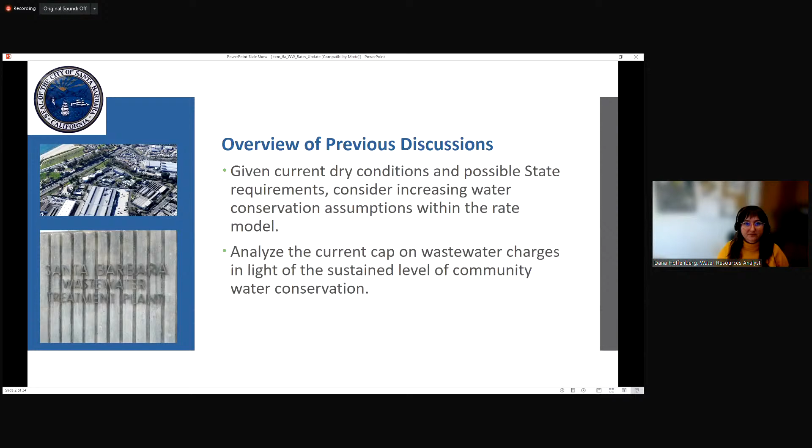Next slide, please. So just going over a summary of some updates to the rate model and rate design.

So first off, water conservation. Originally, the model had 0.2% assumed annual conservation. What we did is bump that up to 2% annually for our residential customers during the 3-year rate making period.

That does have effects on the rates, increasing our overall revenue requirement from 6% to about 7% on average. So last time we spoke in January, we discussed a revenue requirement of about 6%. The model is now reflecting 7%. Just as a reminder, this is an overall system revenue requirement, so how that impacts individual bills will vary depending on the customer class.

Mr. Haggmark: Yes, I just wanted to remind the Water Commission that when we're going through this process, we're establishing methodology for the highest rates that the council can ultimately adopt. Certainly, if we find ourselves in a much better water supply situation, or get a miracle month of March, the council, even if we move forward with the current rate notice, could adopt something lower if our situation improves.

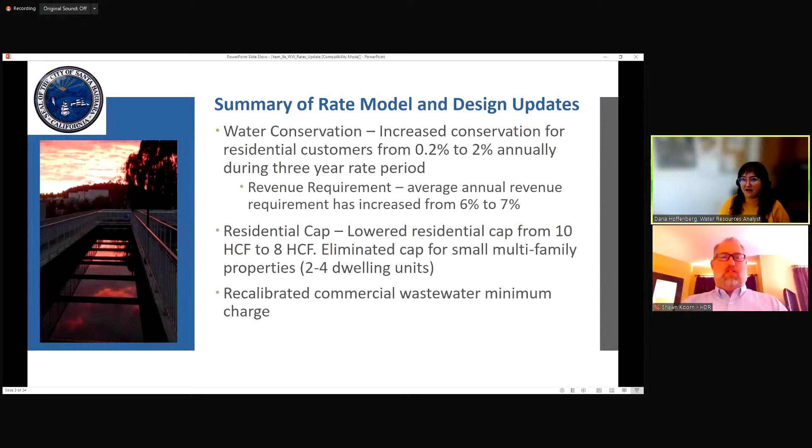And lastly, for our commercial customers, our analysis indicated we need to do a little recalibration for our wastewater minimum charges to be more in line with our cost of service analysis. So with that, I'll ask for the next slide and turn it over to Mr. Koorn, our rate consultant.

Thank you, Ms. Hoffenberg. Good morning, Chair Davis, Commissioners, and Council Member Snedden. I appreciate the opportunity to be with you again. As we kicked off many of these meetings recently and in the past, I just want to remind you all of our overall goals as we go through this process.

It really boils down to a primary goal of providing sufficient revenue to operate and maintain the city's wastewater infrastructure through cost-based and proportional rates that meet the requirements of Proposition 218. That's really what this whole process is about. And if you remember, it's a three-step process. As Ms. Hoffenberg noted earlier, it was 6 to 7% overall—that's the revenue requirement component.

We then need to go into the cost of service to determine the proportionality for the rates for each customer class of service, or your rate schedule—your single family, multifamily, commercial, and commercial high strength customers. As we go through that process, that gives us the basis for the requirements of 218, and then we can develop rates to meet those overall requirements that reflect our cost of service analysis.

So this morning, I'm going to walk you through the updated revenue requirement, as mentioned earlier, with the changes and discussion from the last Water Commission meeting. And then we'll talk through the overall results of the cost of service and the recommended rates.

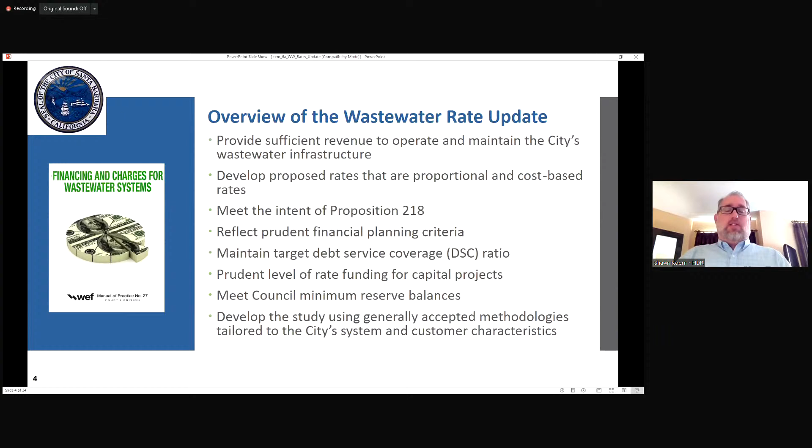So I'll start off with the revenue requirement. Remember, this is the first of our three analyses. And on the next slide, we have our summary of the key assumptions. Ms. Hoffenberg already touched on this. We did, based on our discussion with you all, go back and take a look at this in our single family and multifamily, so our residential customers.

We've reduced by 2% annually in fiscal years 23, 24, and 25. Our commercial and commercial high stayed at that 0.2% conservation for that same time period, given when we look at the consumption patterns, what that looks like with the recent pandemic and where things are moving going forward.

The O&M, remember, our operations and maintenance expenses are based on the fiscal year 2022 budget, and then we've adjusted that out into the out years. So for fiscal year 23, this upcoming budget year, starting here in 4 or 5 months, we've adjusted that to reflect what we talk about as known and measurable changes. So as an example, chemical costs have increased lately, and so we built that into the overall budget for this upcoming budget year in the rate study document.

Moving forward, so fiscal year 24 and out, that average inflationary increase is 3.5%. So as we talked a little bit about last time when we met, current inflation is, depending on the indices, 5 to 7 or a little bit more percent in recent months, year over year. This is the historical level of inflation that we've built out into the future.

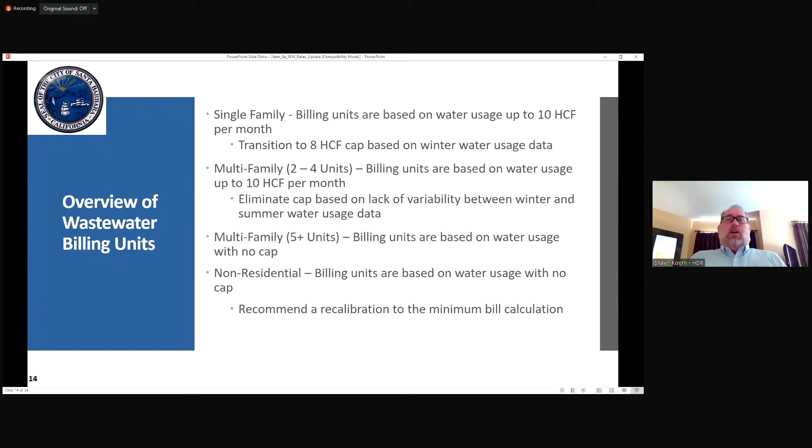This gave us some additional data points to come back and say that this 8 HCF cap is more reflective of how your residential customers are utilizing the system from a wastewater volume generation perspective. So thinking about how we're using water indoors in those winter months, that's coming back to a new normal, or that amount we're going to be set at going forward for some time. So that gives you a little more background on that.

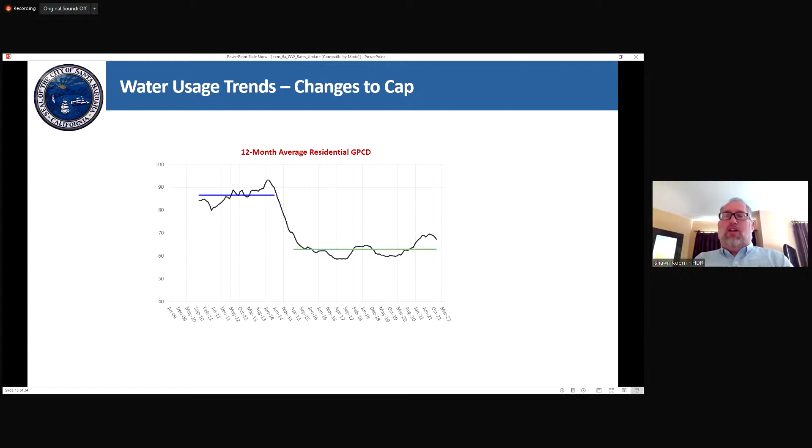On the next slide, as we go into our single family rate structure, there's a flat fixed charge, a base fee per month, and then our variable charge up to the cap. You'll see 6 rows of the volume charge. Our current rate is $3.71 per 100 cubic feet up to 10. In '23, we reduced that to 9. In '24, down to 8, and then it stays at that 8.

What we wanted to do is transition this in over a couple of years so that customers could get used to what that adjustment is going to be and minimize any bill impacts into the future, but also provide that known change that's coming up. So this represents that overall rate adjustment. You can see the adjustment to that monthly fixed charge and then to the volume charge as we go through that.

On the next slide, we have our multifamily customers. They're billed very similarly: there's a fixed base fee, and then per dwelling unit. There's a volume charge up to the cap for the 1 to 4 dwelling units, and no cap on the 5+ dwelling units. Our recommendation is to move the 1 to 4 dwelling units, the small multifamily, to no cap, given the review of their information. Those rates then reflect the overall billing units on the system.

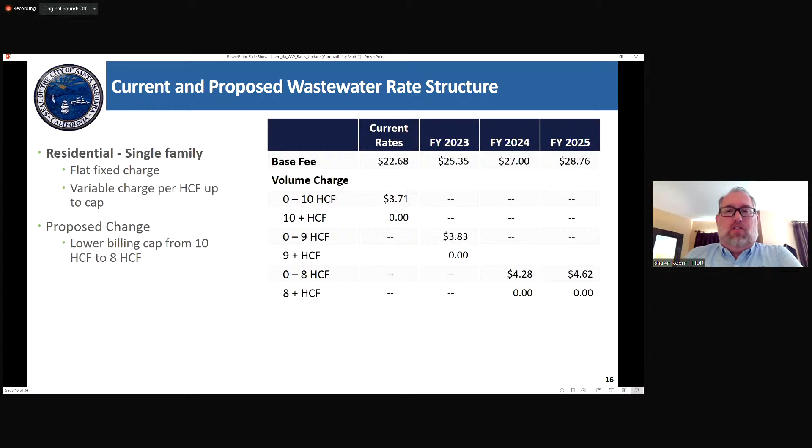So moving forward, the multifamily follows the same approach, with the exception of the 1 to 4 dwelling units. We did remove the cap in fiscal year 23, and those rates are adjusted the same as the single family rates.

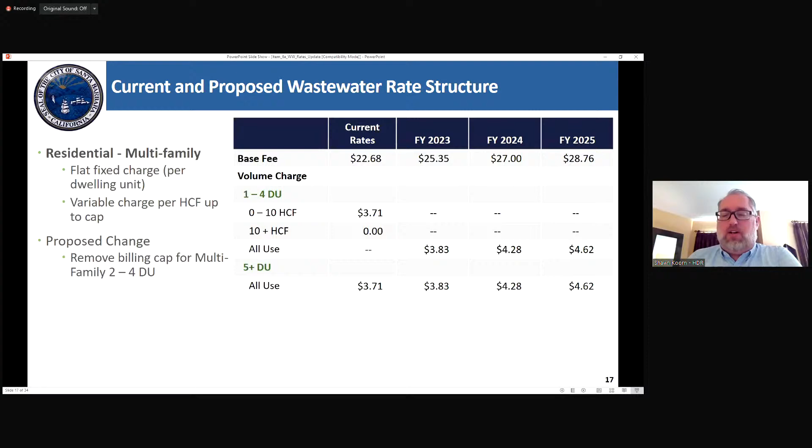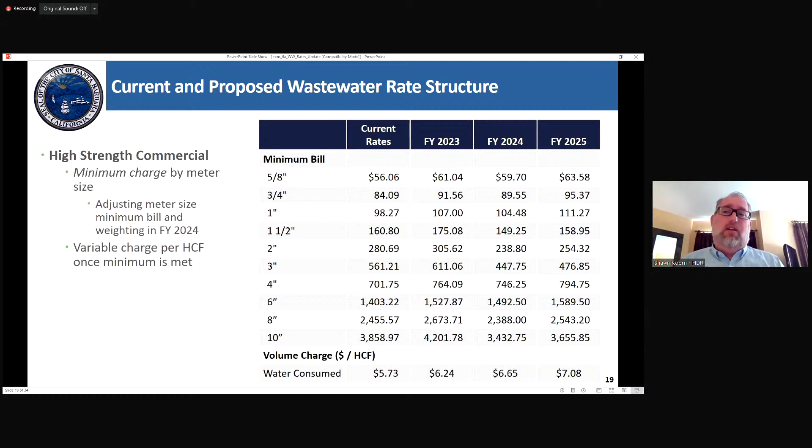Finally, on the next slide we have the high strength surcharge for customers in the high strength commercial class. If they go over those strength limits, there's a surcharge on a per pound basis. Those customers are monitored and tested, so we know the strength of the wastewater and the total amount, allowing us to calculate total pounds and charge accordingly. This is impacted by the increase in chemical costs -- that's built into our revenue requirement, but when we allocate those chemical costs, they're really tied to the strength-related components.

Our BOD, biochemical oxygen demand, is staying flat for fiscal year 23 at 32 cents per pound, then adjusting in the out years. Our TSS, total suspended solids, is 42 cents, increasing to 46 cents. Our ammonia is currently 98 cents per pound, increasing to $1.10 per pound. As we evaluate why costs are incurred, ammonia is a key driver in the cost of service right now, which is why you see a bigger proportional change in that component cost. This applies to customers who are tested and discharging higher strength waste than what's included in the commercial high regulations.

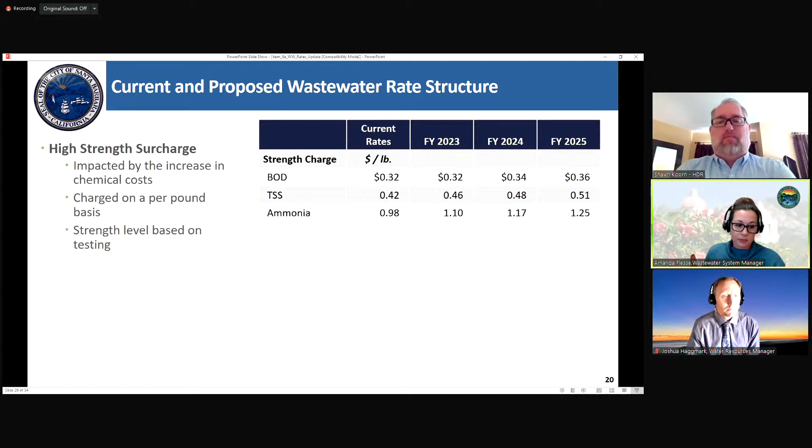Thank you. So on the next slide, we start getting into some of the bill comparisons, and I'm going to turn it back over to Ms. Hoffenberg to walk you through some of these comparisons.

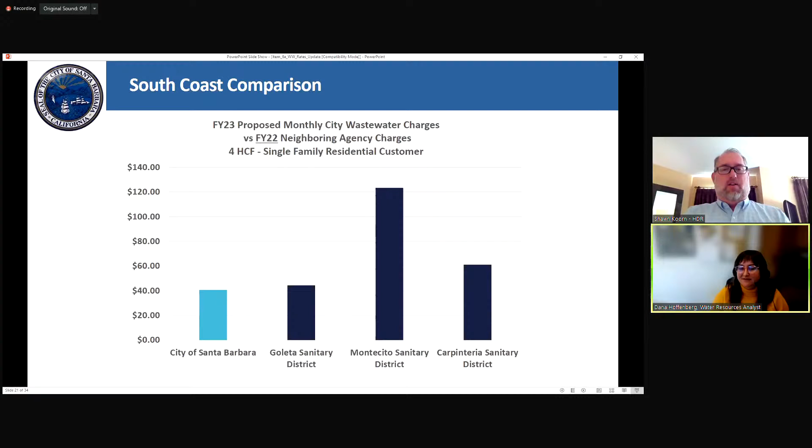Okay, hello again everyone. So we're going to reset a little bit and look back at single family bills. This chart shows a bill comparison for a City of Santa Barbara wastewater customer compared to some neighboring agencies. A couple of points to keep in mind: this compares our proposed rates to our neighboring agencies' current rates, since their proposed rates weren't ready yet. So keep in mind it's possible their rates will change, probably increasing, given everything that's going on.

That's why it says FY23 city rates compared to FY22 neighboring agencies. Our neighboring agencies also have a different approach of billing their customers than we do. As we've discussed, we have a volumetric component for our customers, while our neighboring agencies just have a flat annual charge. So it's going to look a little different as we go through the different water usage levels.

This is for a single family residential user, a low water user, a low discharger, only 4 HCF. You can see we're on the left there, so we have a pretty low bill compared to our neighbors.

This is more of an average discharger for single family residential compared to our neighbor agencies. We're still right in the pack, and I anticipate we'll still be right in the pack after our neighbor agencies have changes to their FY23 rates.

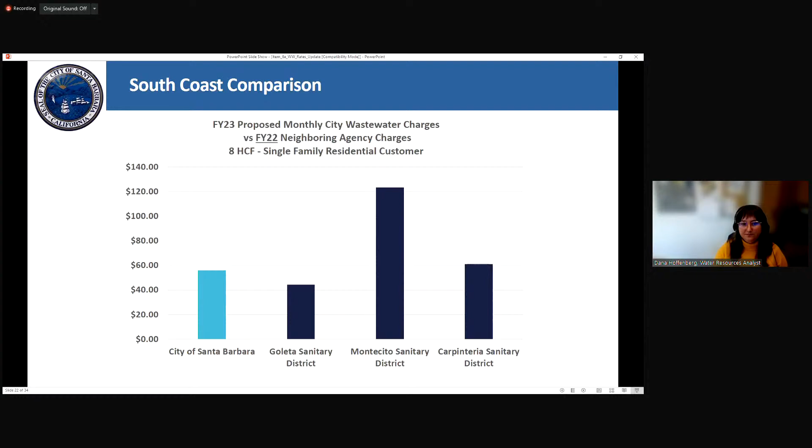As you know, we are a full service city. We have many different things that we charge for on our utility bills: water service, wastewater service, and trash and recycling service. A single family customer who has all those services will receive one bill with all of those services on it.

Going over next steps, we want to finalize our technical analysis based on any input we get today from the Water Commission. We also have another portion we're going to go over, which is our capacity charges, and then we're going to be presenting our final recommendations in March at the Finance Committee.

We're going to do a public rate notice, and then we're going to have a public webinar talking about the rates for people who want to ask questions or be more involved, in May, and then our public hearing in June. And Joshua, did you have anything you'd like to add?

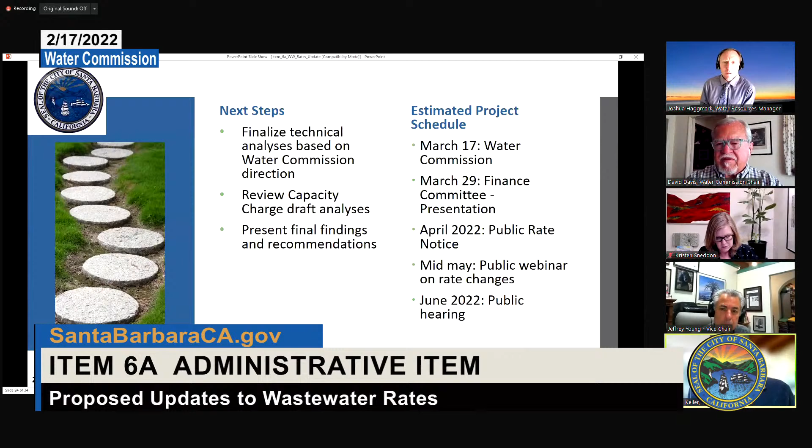I wasn't thinking about that specifically, but I think it would be good to have it as a recommendation so we can actually see it, see what the recommendation is likely to be, and then we can go ahead and either vote on it or comment on it before it goes forward. That would be the intent of putting it on consent - you get to see the full package and make a recommendation to Finance Committee, that would be the packet. It's just whether you want another presentation on the wastewater rates, because we don't see them changing from what was presented today. So that was the intent there.

Just to note, if there's something of interest, we can pull it off consent - even though it's on consent, we can always pull it off. Other commissioners want to weigh in on that question? Arturo, you still have something? No, not on that question, I have some other questions. I agree with Arturo, so that's helpful. Yeah, as well as I. Okay, there you go. So, Joshua?

My question is with respect to the unusual levels of inflation we're seeing everywhere. I know we just completed this study, but one can imagine that things like the upgrades to the El Estero Center, in terms of electrical equipment as well as operational costs, are going to change significantly. How robust is the current analysis to those changes we may have in the near and midterm future? We've done our best to try and mitigate those.

You'd see we have a 3.5% inflation plan for the next 3 years, so we're planning for roughly 10% inflation over the next 3 years. Our current rates for construction are reflective of what we've seen this year, so we've projected that out and incorporated the accelerated inflation we've seen this year.

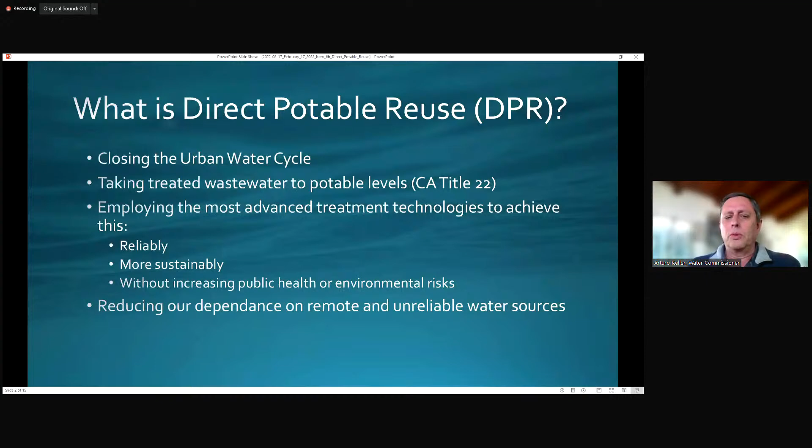So next slide. Just a quick recap. I know the Water Commission is quite familiar with many of these topics, but just for the public that may be listening, where does our water come from? It's important to think about that. We have a significant amount of our water coming from local surface waters, both Cachuma and Gibraltar reservoirs, but those are quite variable. They're very dependent on our climate. And as we see, we've had a number of drought years, and it looks like that will be kind of the new normal to have more and more of these very dry years. So our local surface water is quite dependent on the climatic conditions that we may have.

Another important source is the Sierra Nevada, and by that we mean bringing water from the Sierras down to our local communities through the State Water Project. There are other projects that bring that to other communities; this is specific for Santa Barbara that we're talking about here. And so that's a fraction, but again, a very unreliable fraction because unfortunately, as we know, the snowpack is very inconsistent and the ability to bring water varies tremendously from year to year.

The third one is local groundwater, and that includes Mission Tunnel, which has seeping water considered kind of a local groundwater. That's a small fraction, as we see in the diagram, in terms of groundwater. We don't have a very large aquifer that we can tap into, so it's something we can rely on, but we have to let it sit around and rebuild itself so that it fills again and we can use it reliably.

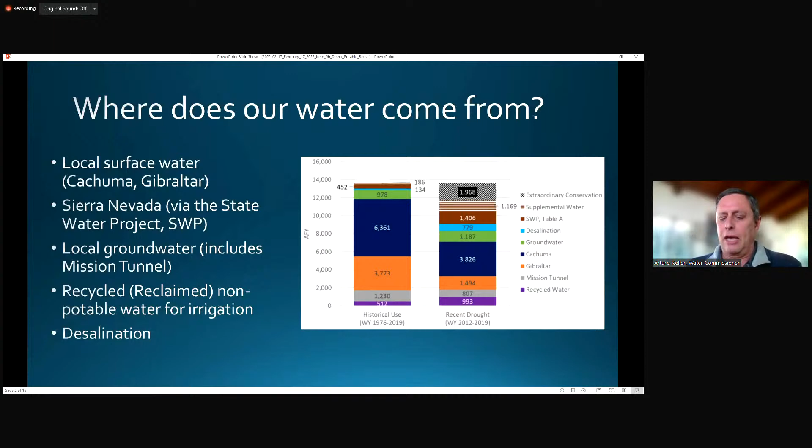Next slide. So what I mean by closing the urban water cycle - let's take a look at this diagram. Start on the lower right-hand side where it says start. There, we're taking our water from groundwater or a reservoir, for example Cachuma or Gibraltar or other reservoirs that other communities may have, or other surface water sources. It's brought into the system, and we go up on the right-hand side.

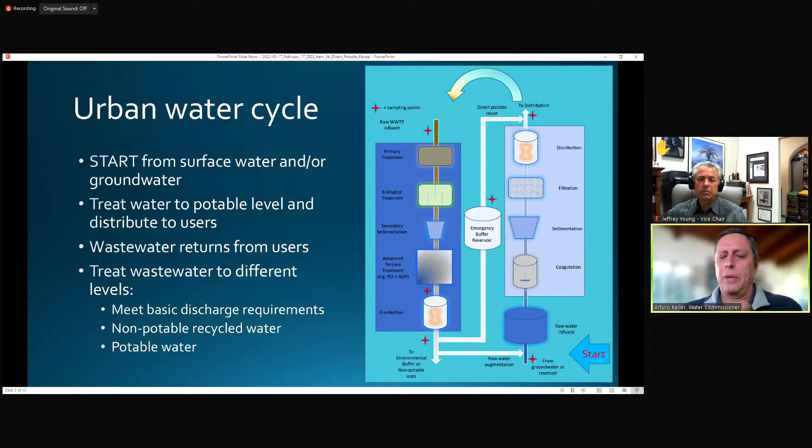And if we go back to that slide just for a second—I have these little stars, which are some recommended sampling points. As we'll talk about monitoring, it will be important to keep in mind that we would like continuous monitoring of these sampling points, because that will be important in terms of making sure it's reliable.

So, next slide. I was talking about the most likely treatments, which are what's called micro and ultrafiltration.

These are basically steps to remove most of the chemicals we have of concern, but the pore sizes for micro and ultrafiltration are still too large for some of the molecules we need to remove. So they serve to do a pre-treatment before the next steps, but they're not effective in completely removing things. So then we go into a very, very fine pore, and I'll show a diagram in a couple more slides of what reverse osmosis is.

Reverse osmosis is going to remove many salts present in our wastewater. Humans consume a lot of salt, not just sodium chloride, but other salts like potassium and other things we may be consuming. So we need to remove some of these things from our waters. So that first part is some of the salts.

Also, many of the organic molecules that may be from personal care products, pharmaceuticals, as well as industrial discharges or other things that may still be left behind after all the treatment process. So reverse osmosis is another barrier for removing all of these, making sure that we don't have that.

And then finally, advanced oxidation. This means that we're taking some source, for example, either ultraviolet light with hydrogen peroxide or ozone, to really oxidize any organics that may still be left behind. So the idea is to try to do a very, very complete treatment.

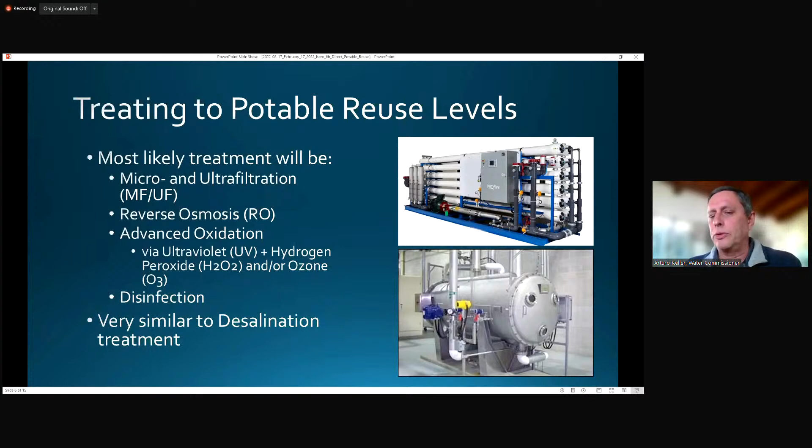So the next question is, what can be achieved? Very high removal of most pollutants. In most cases, it's down to levels of non-detect, even with today's very advanced instruments, where we can detect many of these contaminants down to not only parts per billion, but even a tenth of a part per billion in some cases. So very high removal of most pollutants, very high removal of salts.

In fact, it's such a high removal of salts that you actually have to add back in some minerals. Just like with desalination, it's so effective in removing salts that the water has no calcium, for example, and we need calcium for our bones. So it's important for us to keep that in the system, and it has to be added back in.

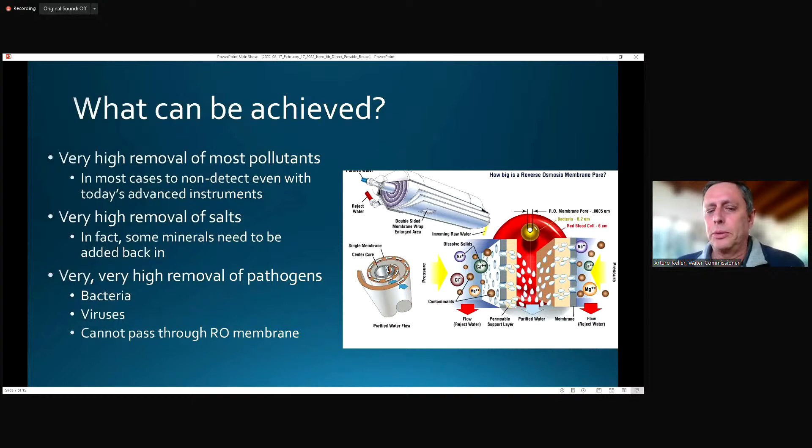Going back to Commissioner Young's question, why are we concerned? Well, there are some molecules we are concerned about—very, very small neutral molecules. The membrane has a charge, but the molecules are neutral, meaning they have no charge, like some pharmaceuticals and some disinfection byproducts. They could make it through the membrane at levels that are really very low, less than a part per billion in most studies. We're seeing very low levels, but it's a concern where some of these chemicals make it through. Some inorganic ions—it's unlikely we'd have much arsenic, but if a source elsewhere in the state had arsenic, it could be something to consider.

Bromate from disinfection is present at very low concentrations, but the question is what are the health effects if you're exposed to this on a long-term, chronic basis. The list shows some of the chemicals of concern. The state has identified these and is regulating to try to keep them down to very, very low levels if they cannot be removed completely.

So how do we monitor them? One option, as we've seen in the previous discussion, is to take samples in different locations and send them to the laboratory. We have very advanced instruments today that can detect even parts per trillion in some cases, so we can detect them at very low levels that would not cause concern. But that's a time-consuming step—you have to take the sample, send it to the laboratory, and get results maybe a few hours later, sometimes days later. That would imply many facilities would need a very advanced laboratory in-house.

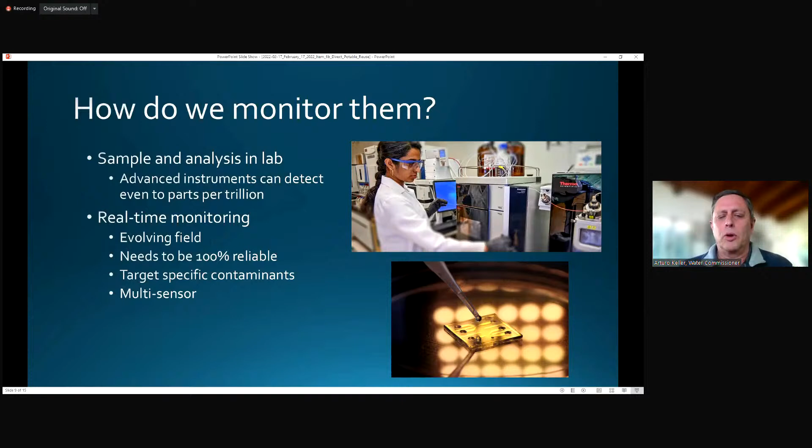Any questions there? Okay, so here's an example of one of the molecules of concern. It's called NDMA—it has a long name, so just NDMA for now. It's a disinfection byproduct, so this occurs when we're doing disinfection. It gets generated and may remain in our system.

The idea, starting from the left-hand side, is that you'd have online monitoring before, for example, the reverse osmosis, and another monitoring point after the reverse osmosis to see what the rejection was. Were you able to get really good rejection? Shown there are the results in terms of rejection for different types of membranes, using this online monitoring. We're getting to the point where we can do advanced real-time monitoring of many of these important molecules. This is becoming more of a reality, but we'll probably have to wait until it's real before we can consider direct potable reuse for most applications.

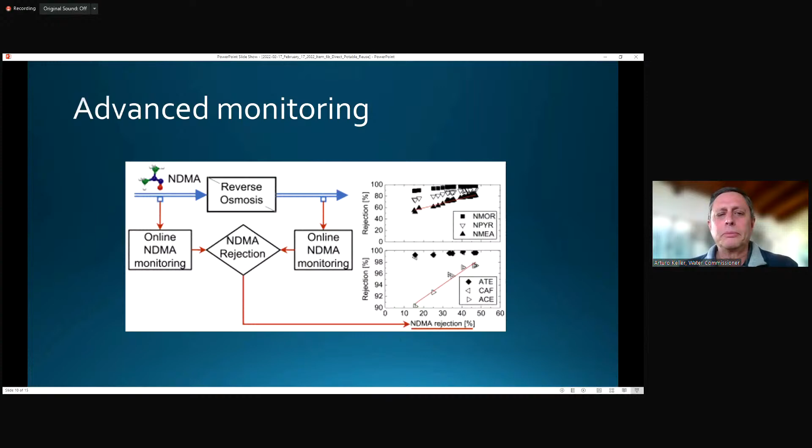Next slide. The other aspect to think about is energy. Pushing water through very small pores, typically 0.1 nanometers or even less in some cases, requires a lot of energy. That's the main point—we need to squeeze this water through those pores, and that requires a lot of energy.

We can see in the diagram that the energy-water ratio for the top process—microfiltration with reverse osmosis, UV, and hydrogen peroxide—would require about 2.5 kilowatt hours per cubic meter. That's quite a bit. Even ozone with reverse osmosis would be quite significant. The third one, microfiltration with ozone and biologically activated carbon, is quite a bit less, which is why there's a lot of interest in getting this BAC process approved.

Now, it may still be that you need RO as a final step, but maybe we can use BAC to reduce some of the costs in terms of energy requirements. So we can see these are significant. The lower processes shown are just to show what these individual processes may be and how they stack up. The big one is the reverse osmosis, the nanofiltration or microfiltration—reverse osmosis is the one that really drives up the energy consumption.

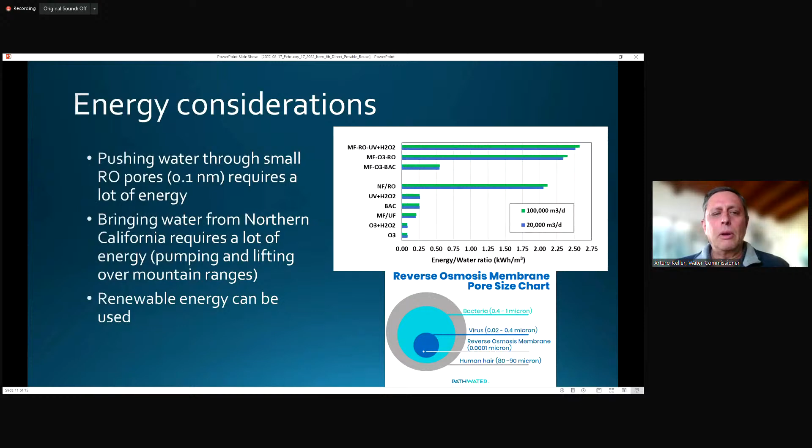Other issues with direct potable reuse: direct means no room for error. You have to be prepared for equipment failures, operator errors, accidental releases, and security issues. That's why having redundancy in our equipment, having monitoring that's directly online so we can avoid operator errors, and making sure we have a plan for dealing with accidental releases are important aspects that have to be taken into consideration.

One alternative is to go indirect. In fact, that's probably one of the better options, for example, for the city of Santa Barbara to consider indirect potable reuse, where we have sufficient storage time so that we minimize the possibility of all these potential issues.

You also have the disposal of the reverse osmosis brine. These are concentrated residuals of the chemicals of concern and salts, so we need to think about that in general. It's also a high cost of treatment—this will be significantly more expensive water than most of our other sources, but it compares against having no water in some places. So it'll be important for many communities.

Also, because the wastewater treatment plant is at the low end of our distribution system, we need to pump that water up gradient, which means putting energy into the system. In many communities, that will be another energy consideration. For our community here, we are very well knit in terms of our one water system, with no issues between our water treatment and wastewater treatment. In other communities, they need to work on that, because they are separate entities, and those water agencies have to work together to make this a reality.

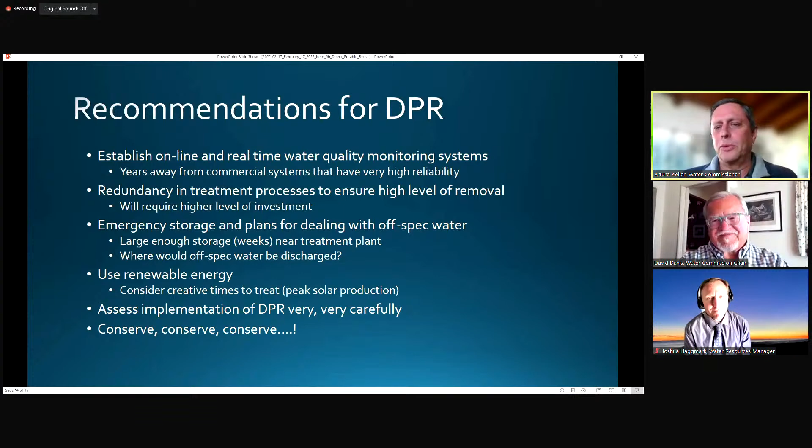No, thank you, Arturo. That was a great presentation, really informative. I've been thinking about this for a long time, and it really raised new questions for me. So thank you for that.

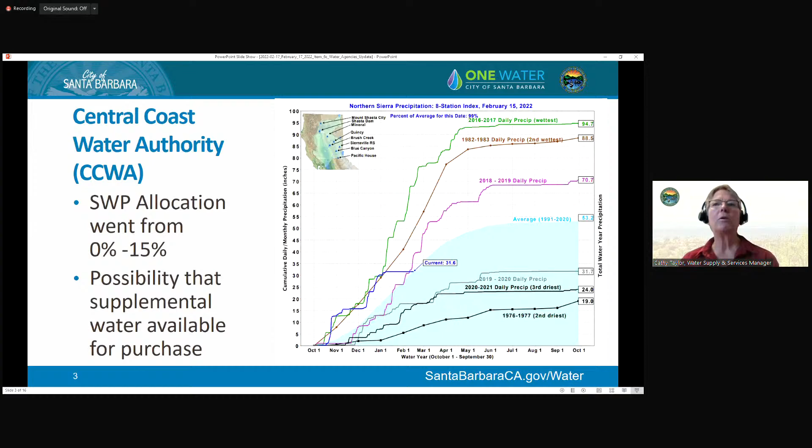What this means is that our state water project water allocation started out October 1st at 0%. With the rain we got through the end of December, it went up to 15%, which was good news. This also means there is a possibility that supplemental water will be available for purchase, and I will be speaking about that later in my presentation.

CCWA has been working on a water management study, and they wrapped that up and adopted it at their last January meeting. The primary recommendation for us was that CCWA explore a shared conveyance capacity program among the coastal branch contractors.

They also will explore a program to transfer excess Table A water, our state water project allocation, between the San Luis Obispo Flood Control and Water Conservation District and CCWA, and explore an external storage and exchange program for the coastal branch contractors, and lastly, explore supplemental groundwater supply options.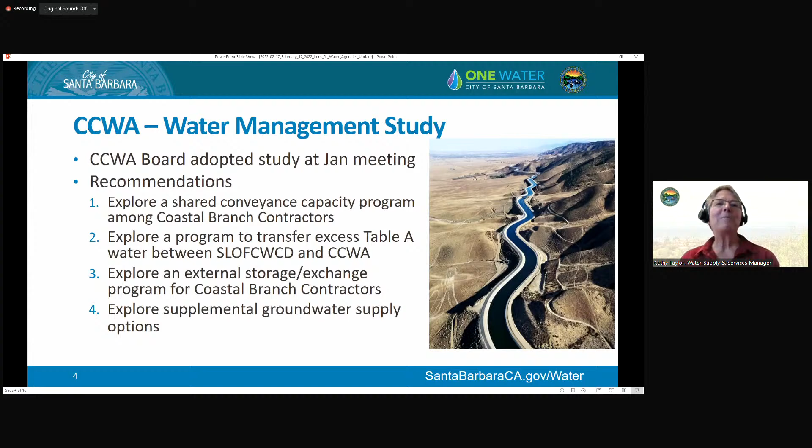CCWA is also working on the Warren Act renewal. The Warren Act enables CCWA to deliver non-Cachuma project water, which is state water project water, to Cachuma. The current contract extension expires in June 2022, and CCWA has had a difficult time engaging the USBR, United States Bureau of Reclamation, on negotiations.

CCWA is wanting another 3 to 5 year extension because at this point there's not enough time to negotiate a new long-term contract with the USBR. The CCWA board has also asked the USBR to have a short-term contract in place for CCWA's April board meeting for approval.

I mentioned the supplemental water purchases. These sources would be coming from Mojave, AVEK (Antelope Valley East Kern Water Agency), Casitas, Yuba, and others. The city of Santa Barbara has requested 20,000 acre feet of supplemental water, and this would be a cost of about 1,200 to 1,400 per acre foot, for a total of $2.4 million.

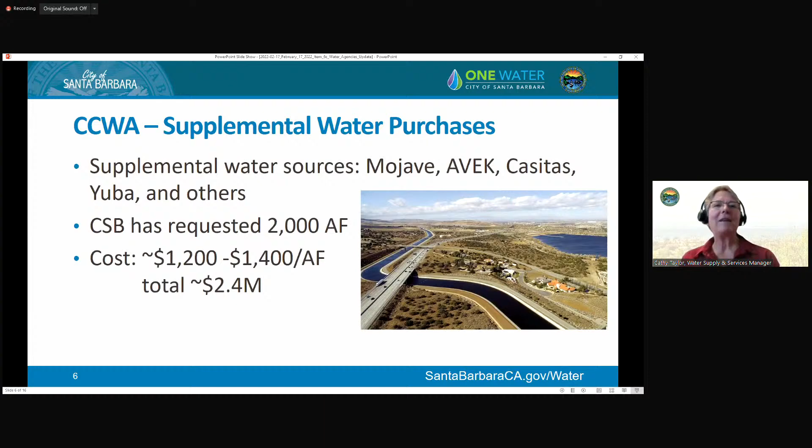Taylor, I think you said 20,000 acre feet, you meant 2,000 acre feet. 2,000 acre feet, I apologize. 20,000 acre feet? No, we'd be sitting in it - extra zero there, I apologize. But the total again, the total cost would be $2.4 million.

Just to remind you about Lake Cachuma and how it operates: it was designed so water flows via gravity from the lake into the intake tower, through Tecolote Tunnel, down to the South Coast conduit into the Cachuma member units on this side of the mountain, entirely by gravity. It also goes through our Cater water treatment plant, is treated, and delivered throughout a lot of the city, especially the lower zone like our offices, entirely by gravity.

However, when the lake got direly low, we had to install a pumping station floating on a barge in the lake. This pipeline is connected to pilings, and it would float up and down on the pilings depending on the lake level. However, what CCWA wants to do now is install a secure pipeline from the intake structure to what we knew as Site 1, approximately two-thirds of a mile out into the lake.

Eventually the barge was moved to Site 2, but right now they're just looking at Site 1 to install a secured pipeline, again from the intake structure to the floating barge. The decision to install this pipeline will be made in April or May of this year.

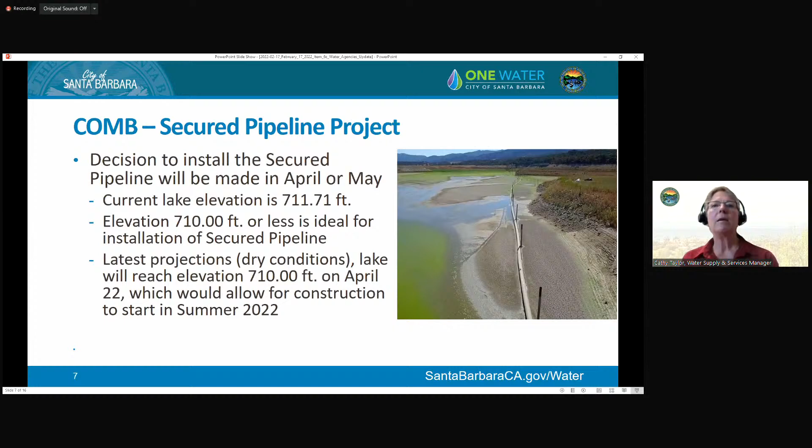Construction deployment would begin in summer 2022 and take about 3 months. The only concern is pipe procurement - they're checking now to see if the pipe is available.

This picture shows the intake structure and the pipeline, about two-thirds of a mile out to the barge, and that's how we were getting water during the last time the lake was so direly low.

Cost estimates: planning is $214,000, construction is just under $3.5 million, and operations and maintenance would be about $16,000 annually. Fortunately, CCWA has secured $750,000 in grant funding from the USBR through their WaterSMART Drought Resiliency Projects Program.

COMB is also looking at the emergency pumping facility, or EPF. Before, when we were just relying on the temporary system with the pilings and floating pipe, it took about 12 months to deploy the system. So you'd be deploying it with another winter coming before you might need it, and if you got a wet winter, you've spent a lot of effort and expenditure on something you don't need. That was a disadvantage.

But with the secured pipeline, it would take about 4 months to deploy the emergency pumping facility. And the emergency pumping facility must be installed 45 days before the lake reaches elevation 685. So that's the target we back out of.

Once we hit elevation 679, we lose the gravity flow, and that's when we actually have to start pumping the water from the lake to this side of the mountain. This is a picture of the barge and the pipeline, and you can see the pilings that were supporting the floating pipeline.

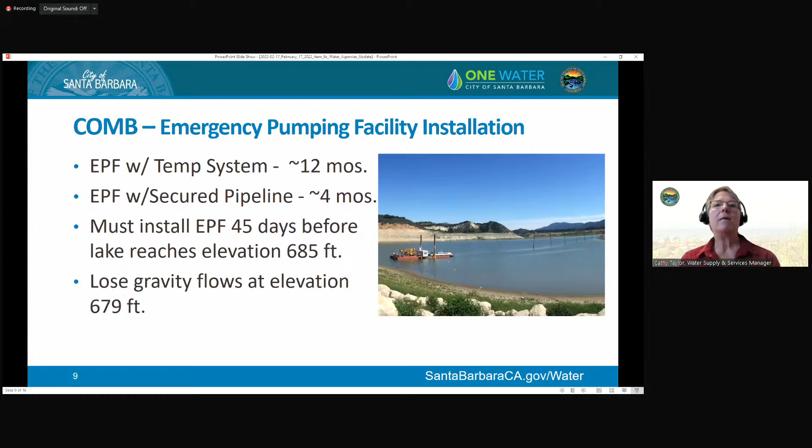COMB has done some modeling and anticipates the lake will reach elevation 685 on June 15th, 2023. Working backwards, deployment would be needed 45 days prior, on May 1st, 2023. With the secure pipeline, the emergency pumping facility deployment decision would be necessary by January 1st, 2023, rather than May 1st, as would be the case if we were still relying on the temporary floating system.

The barge deployment, of course, depends on fish releases, conservation, state water inflows, watershed inflows, etc. This is a picture of the barge itself, again with the pipeline and the pilings.

It's interesting, if you look at the pilings, not much is showing in this photo, but the lake's watershed is huge, and when storms really get started in the backcountry, the lake can fill quite quickly. They have to pull out these pilings before they become submerged. Otherwise, it's near impossible, and they become a navigational nightmare for pleasure boats on the lake. So they have to pull them before they're submerged, which is another tricky problem to negotiate.

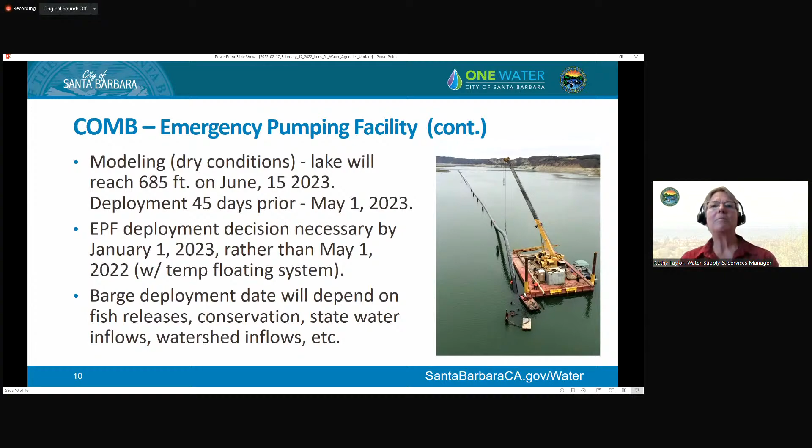Next, I'll talk about the Santa Barbara County Office of Emergency Management. They, along with Environmental Health Services and Santa Barbara County Water Agency, are desiring to host a biannual Santa Barbara County External Drought Task Force meeting.

While we plan to participate, it's going to be difficult for the Cachuma member units to participate. Currently, CCWA and the Cachuma member units are in a lawsuit with the Santa Barbara County Water Agency, and currently we're in the discovery phase.

Also, the Santa Barbara County Water Agency represents the Cachuma members on the Cachuma Master Contract Agreement with the USBR, and the Water Agency requested a 60% allocation for the Cachuma member units from the USBR, even though the Cachuma member units requested 83%. This put us at odds with the Water Agency, and the Cachuma member units eventually negotiated a 70% allocation from the USBR, but we don't feel we were really well represented by the Water Agency.

Given that, we do plan on attending their meeting and being really good listeners and participating to the extent that we can.

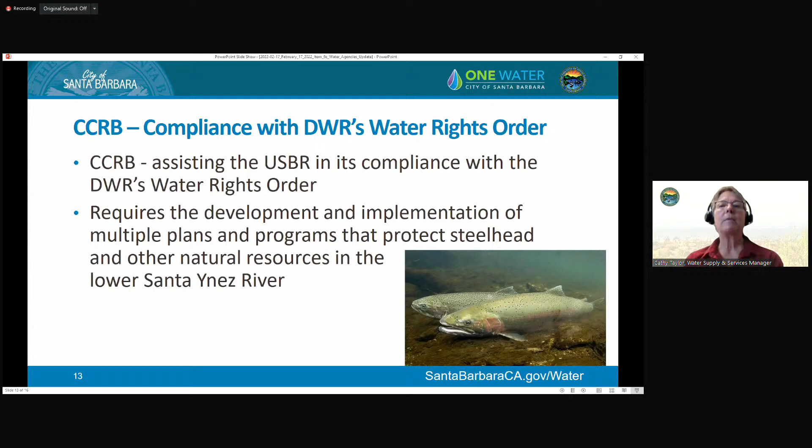CCRB is also engaged with the California Fish and Game Commission to consider a petition filed to list the Southern California steelhead under the state's Endangered Species Act. There are many implications for habitat restoration and infrastructure maintenance efforts below Bradbury Dam. The listing could open water purveyors up to incidental take violations. The Fish and Wildlife, who serve basically as staff for the Fish and Game Commission, have analyzed the petition, however they failed to take all the stakeholder comments into consideration.

So CCRB has requested that the Fish and Game Commission remand the petition for additional analysis, specifically that they address all the stakeholders' comments. CCRB has also asked the Fish and Game Commission to approve a blanket incidental take protection for water purveyors and others who are performing habitat restoration work and infrastructure maintenance on the Santa Ynez River.

Next slide, please. So with that, in summary, there's a lot of things going on with the water agencies, and I'll take any questions that you might have.

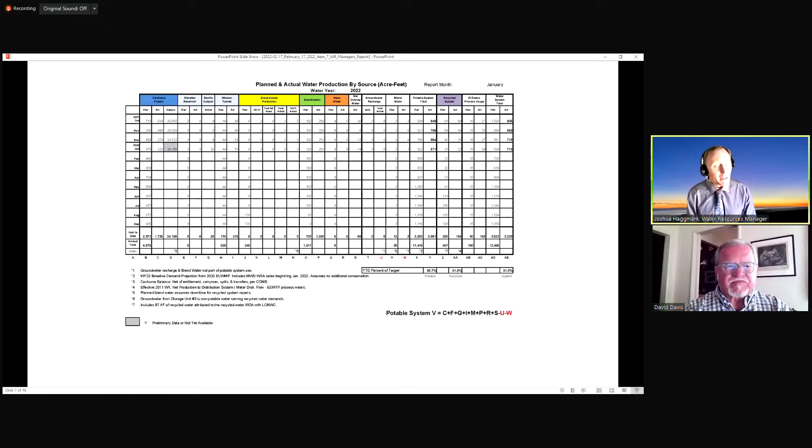So we're following those issues, but we're feeling very optimistic about where the city is. Now, the other member agencies on the South Coast are in a different situation, and the state is in a far worse situation. So just wanted to note that because it's not the same all the way around.

The city's customers are doing a fantastic job with water conservation. We're hovering right around 24, 25% on our 12-month running average over 2013, still doing a fantastic job. We may need to ask for a little additional conservation, but we'll be analyzing that and come back to you in March to talk more about it.

Desal, again, is coming through. Not only is it providing water today, but it has allowed us to really have our groundwater wells off for the last 3 years. And it's allowed us, as you can see in this column highlighted in gray, the city has a significant chunk of water sitting in Cachuma in the city's name, standing by, ready to help us meet the needs for at least the next 3 years. Depending on demands, it may go far in exceedance of that.

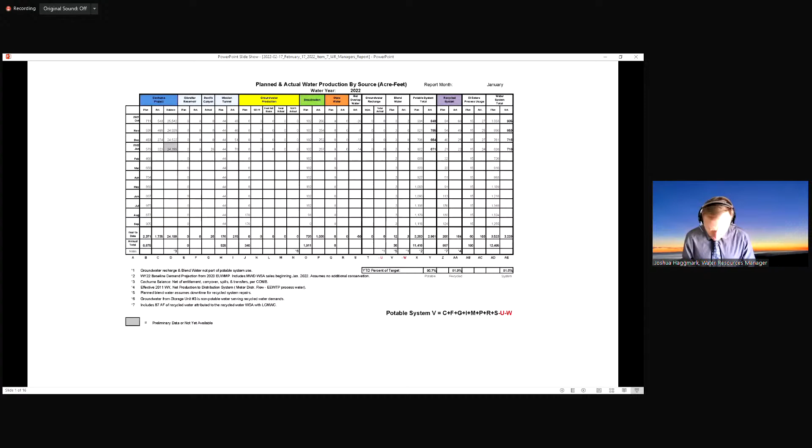So anyway, we're planning on providing a comprehensive update for March, and we'll do our best to kind of project out what the state may be asking all of us, even though we're not sure exactly where they'll land. Unfortunately, it sounds like they're working on one-size-fits-all rules, which are always challenging.

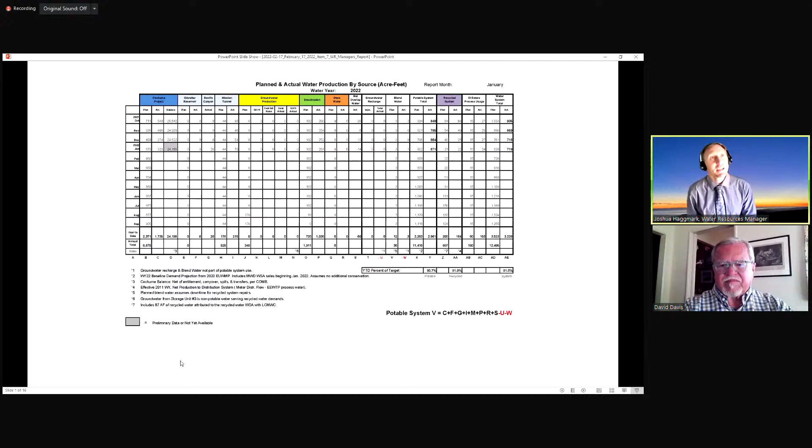The other thing I wanted to mention, we continue to work with Cottage Hospital. We've actually entered into an arrangement with them in which we're doing sampling 5 days a week for COVID RNA in our wastewater. Thank you, Raquel, appreciate that.

So we're starting to get more data points, and it's been great because we've been sharing this data for a long time, but it's really been picking up a lot of steam. I've got a really great article from Councilmember Sneddon talking about different variants that we're finding in wastewater. Just lots of good dialogue going on there.

So Cottage is trying to pull together a team that includes UCSB folks and city wastewater staff to continue, whether it's COVID or other things, exploring what we could get out of our wastewater resources as far as telling us about public health. So we're really excited about that, and think we can lend a lot to the public health discussion, and we're glad it's finally getting some attention.

In fact, they're looking right now into paying extra to have the samples that are being done look for the variants that are present. So that was kind of exciting.

I wanted to also note our water and wastewater revenues are coming in on budget. So despite everything that's going on out there right now, we are looking solid financially, which is the best place to be if we're going to go into asking our community for conservation.

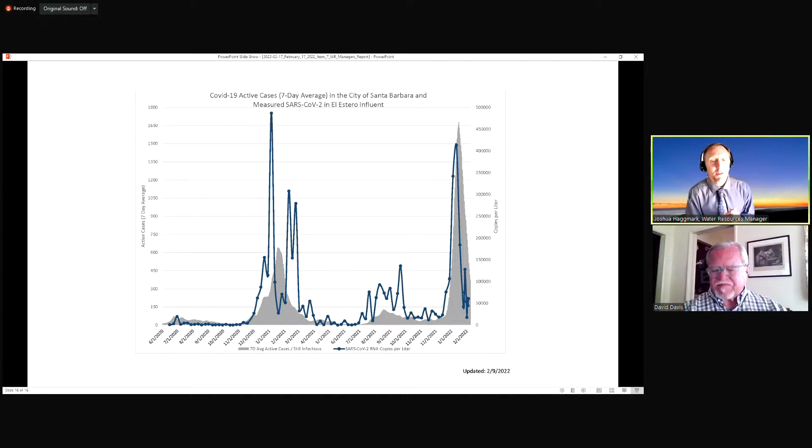And then I also want to note we hired a new collection superintendent, Gary Harris. At some point we'll bring him on and introduce you all to him, but really excited, we were able to get him to move up from San Diego to Santa Barbara. He comes with a strong background in collections, so we're excited to see what he can do with our wastewater collections group.

So with that, I'd like to pause there, open it up for discussion. Questions, comments?

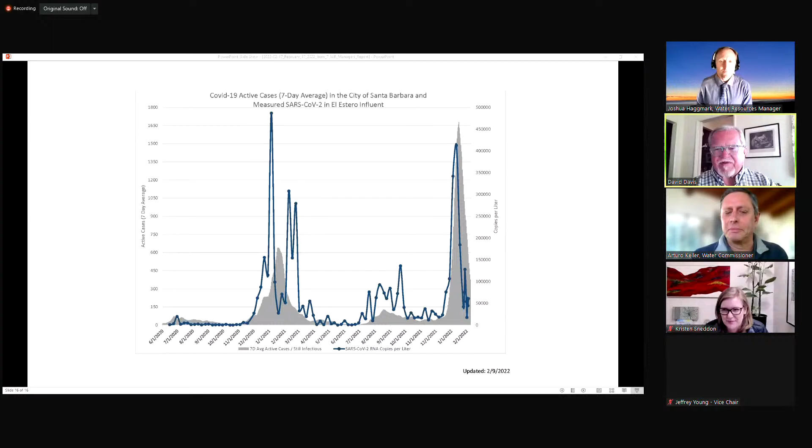Good to hear that we're in good shape. Thanks for that. Yep, always. And this tracking of the virus has been amazing. Yeah, really, really good. Thank you.

Absolutely. I'll just be interested to see what happens over the next 30 days. I usually look at rainfall for us ending towards the end of March. So, fingers crossed we get some more rainfall, but we shall see. Yeah, I find myself toggling back and forth between Redding and Santa Barbara. So you want, if it doesn't rain here, hopefully it's raining there. Yes.

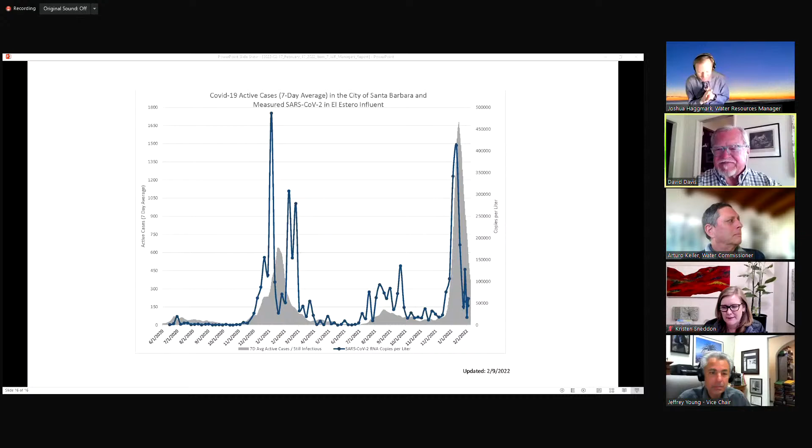Okay, not hearing any public comment, I want to thank everybody, including staff, for great presentations today. And Dr. Keller, again, knocked it out of the park. I want to go to the class too.